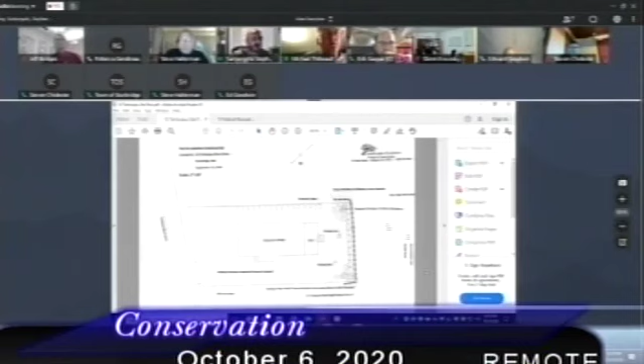Yeah, exactly. So what we were thinking was to just build the stairs in that section and then move those plantings in and along the hedgerow so that we could have a little bit of access down from the backyard to the beach. So that little bare spot there could get filled in with the plants, and then the steps would basically take up where the existing or the proposed plantings would be in that corner there.

Yeah, all right, that was the only change I needed to ask for. And that would be in the location, going through the committees.

Go ahead. No, I was going to say, and that's in the proposed location where the existing stairs, the wood stairs are? Okay, correct. Yeah, the only difference in the proposal is that instead of the stairs protruding into the water or shore area, they would be recessed into the land area.

Oh, okay. Yeah, that would be seen as a good improvement. I think the commission, if you feel that's minor, Steve, and you want to see that shown as a revision, I think you could still, if you wanted to, because it's a very minor thing, have him add that on there. After, if you wanted to approve it this evening, you could still have them add that, send it to me, if you felt that was small enough to be added without coming back to a meeting.

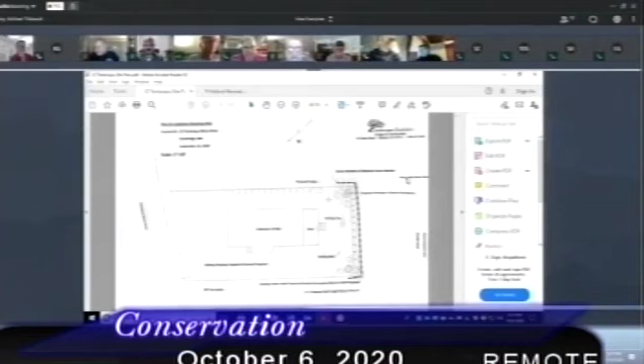I mean, I've seen it probably up on the wall, maybe by a foot, but more often I've seen it with the water not even on the wall. But I don't know what Steve's take on that is.

Yeah, I mean, over the years, I've only been at the property 3 years. And so it has touched the wall, it's come up on the wall, and it's as low as it's been this year.

I can't really speak historically to anything beyond that. Oh, the wall is going where the existing wall is, right, Stephen? Yes, sir. Yep. There's no change.

No change to the wall location or height. And as Becky mentioned in the beginning, I know a handful of you have been out to the property, but there's a really beautiful maple in the backyard, and they intended to preserve that and not change the location of the wall.

What about the foundation? Do you have to change the foundation at all? We had met maybe a month or so ago to talk about elevating the house and putting a foundation under it. That was a request for determination, which was approved. So there's no changes to the house or the footprint or those plans in consideration of these.

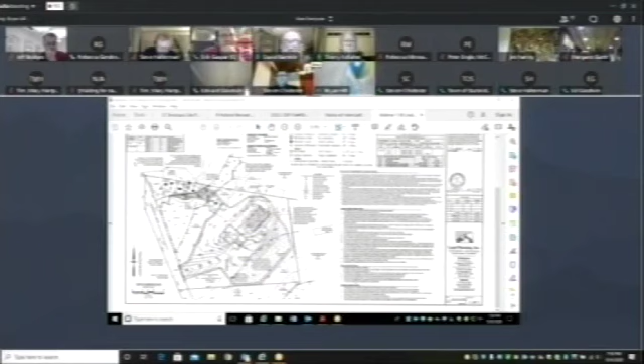All right, I'd like to share with you the stream stats report for that watershed. As you can see where we've clicked, let me get you in. But we can't see your screen. Yeah, you can see where we- Jeff, can you share this? Can he share his screen? No, I'm actually using my camera. I just flipped it to the other side. Where's your screen? Can you see my camera? Hold on one second, let me see. That's the best he can do.

I don't think that's giving adequate indication of where we're at. This report, I can send again if you don't have the link. But the important part is that the 99% duration is at 0.002, so it's about one fifth the cutoff. And the square mileage, I can tell you as well, is 0.25 square miles, so it's a quarter of a square mile watershed area.

Yeah, no, I understand. We always do this first before we flag a wetland. We always run the stream stats on any questionable stream, or really any intermittent stream. First thing we do. And then perennial streams, obviously- Yeah, they're- this one's shown as perennial though. So for perennial, in order to show it's not perennial, there is a process outlined, and that's documenting no flow conditions over a period of time, et cetera.

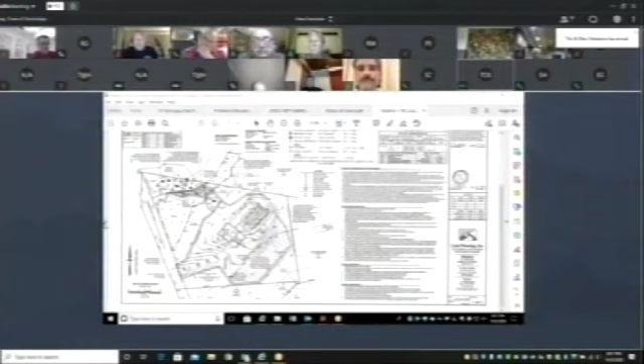That's up to the board. As far as the project as proposed, I'd like that we see, let me put the screen back on here, that the driveway has been relocated outside of the resource area, so there's no direct impact there.

Some things for consideration for the board for the driveway is thinking about runoff coming down there. There was some significant runoff concern coming down the road that does go further down and into the resource area, so it's something they should take into consideration.

And then also the area of the vista pruning is a pretty steep slope that does lead down to a resource area. So I just didn't know, and it's something maybe the commission can take into consideration, if there's an alternative to the vista clearing that would meet the needs of the applicant, that would give him the views of the lake that he's looking for, that might keep the forest floor and some of the vegetation there, so that way there's not runoff into the resource area from that.

And then also, just to remind the commission too, that when we got involved with this, there were some outstanding conditions related to the permit issued for the raze and rebuild on 118 Lead Mine that I know the applicant has indicated he's working on, but those things are still outstanding and haven't been addressed to date. And just so I don't forget, I do have public comment to provide afterwards that was received in writing for the board too. But that's all I have at this time.

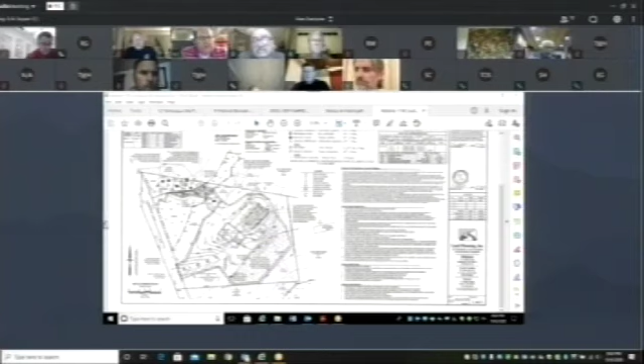Eric? Becky, I have a question for you. When we were out on site, the applicant had mentioned that when the perc test was done, there was another member of the town, I think it was somebody from the Board of Health, is that correct? Because it looked like there was additional disturbance up top.

Were you able to go back and talk to whoever that was and get their opinion on whether or not the footprint of where the house is going would additionally disturb more than what would be required to just do a regular perc test? I did. Actually, the Board of Health agent did accompany me on the site visit, so he did verify that the disturbance was from the perc test up top.

Okay, thank you. I just wanted verification of that.

Mr. Chair, hold on one second. Nothing else. Mr. Chair, where are you? Go ahead. Mr. Hill, we're getting feedback on your microphone somehow. Do you have your volume turned up too loud? Do you have a radio in the background? No, no radio, nothing. All right, maybe turn your volume down a little bit on your speaker. I did. All right, thank you.

All right. Thanks, Jeff. Steve, I see you leaning forward. I figured. I think I spoke. Okay, Stephen?

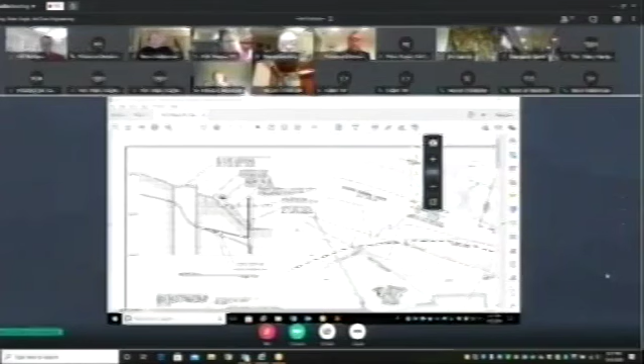As this bank is eroding, that water line is getting closer and closer to the surface. So in order to protect that water line, the applicant would like to armor the bank to stabilize it and prevent any additional erosion. For that stabilization, we are proposing some granite blocks laid on the existing slope with a coir log installed above that with some plantings.

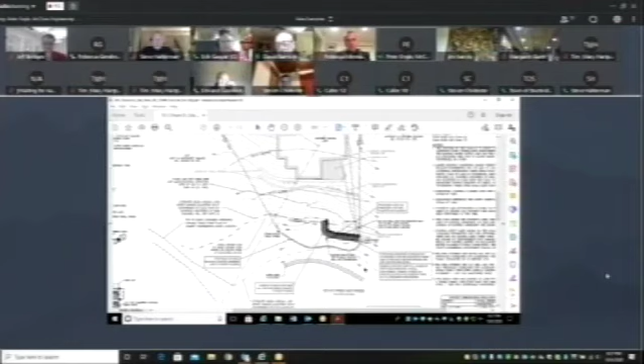This will help to protect that bank from wave action, rising water, ice, and erosion issues. We are proposing some minimal flood storage impacts from that stone, just laying them on the banking there.

This will go to the Army Corps as a self-notification. I believe it qualifies for the self-verification form, and it is within the mean annual high water of the pond. We do plan on filing an RDA with DEP for the Chapter 91 to see if that's applicable to this project.

Also part of this project, there are currently some stairs and an aluminum deck installed on the hill down to that well, which were not originally permitted. Those have been added to this plan to make them legal, if you will. Those would provide access to both the irrigation well and the drinking water well.

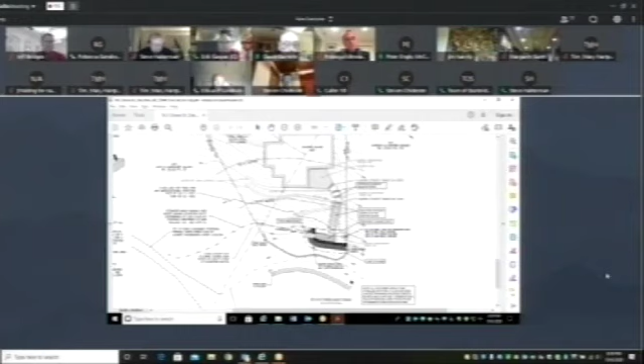Okay, Becky? Okay, so as Ed indicated before, we don't have a DEP file number at this time, so you're going to have to continue this. With that said, the site is mapped as priority habitat for a state-listed plant. Natural Heritage has commented with a no-take for this, so they have no concerns with this project as it relates to that rare species.

So with this for resource areas, or actually to go back, sorry, we did receive an alternative analysis today, which I will provide to the commission for your review. You can look at that before the next public hearing for it. Resource areas on site being impacted...

As Pete said, we do have bordering land subject to flooding. There is bank here and land underwater. The site also contains riverfront area, which is shown on the plan, but there's no work proposed within that resource area. It would appear to me, going back and looking at the wetland regs, that the bordering land subject to flooding would need to meet the performance standards.

So it would appear that you should be looking to make up the flood storage. I think it's 65 cubic feet, I think I wrote down that you had on there. So I would recommend that the commission ask them to see if there's somewhere on the property that you can make up that area, so that way you're not having that impact to bordering land subject to flooding.

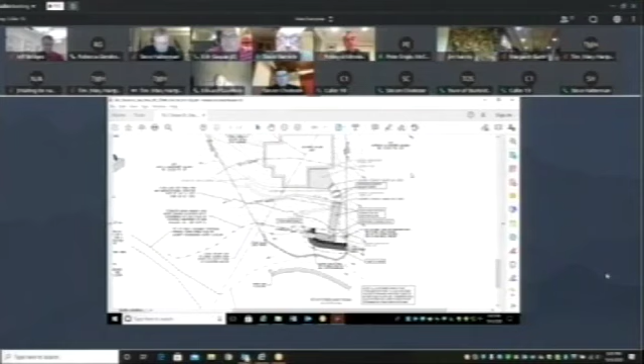All right, so Mr. Nemo, you all right with a continuation? Peter? Yes, I am. Okay. Any further discussion? Mr. Barnacle, public comments. In favor? Yeah, oh yes, that's good. Thanks, we need public comments.

Jeff? Thanks, Eric. Yep, we're on it. Just going to add, I do have a written comment to share, but I'm going to go on the line first. Is there anyone on the line for the Notice of Intent, DEP file number 300-TBA, 76 South Shore Drive? Okay, there's nobody on the line.

Yep, I do have written comment, which I will share. So I did receive an email from Mr. Gary Allard in regards to the notice of intent application for this property.

It says, we are requesting that the commission and DEP not accept or approve the new NOI application requested by the owners of 76 South Shore Drive as written. The owners failed to install the check dams and water control measures on their property that was required as part of their previous orders of conditions. This was for work in a riverfront riparian area for the construction of their new garage.

The Conservation Commission and DEP mistakenly closed their previous orders of conditions without the owners completing the necessary work in the riverfront area that was required. This oversight by the Conservation Commission and DEP allows uncontrolled water flow from their personal property in the riverfront riparian zone to cause damage to the properties below. This has allowed uncontrolled stormwater to bypass the drainage system at 31 South Shore Drive and during heavy rain events causing damage to the roadway, abutters' properties, wetlands, and the lake.

Becky: Yep, so I'll just start on this one. This was a continuation from our last meeting where we did discuss this lot. I did go out and do a site visit, as the board did, then I went back out to review the delineation a little bit more. So what you see in front of you here is a revised plan. I'm just going to kind of zoom in here.

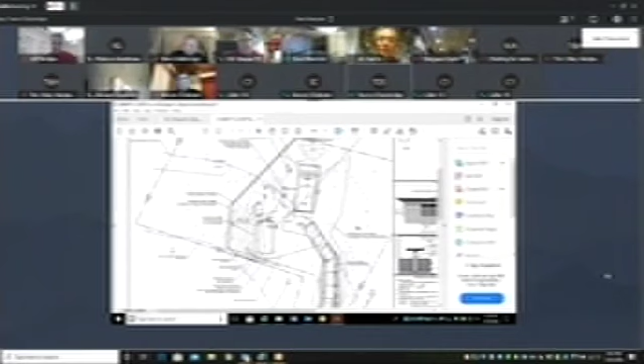So upon review of the delineation out here, I did have some concerns with that delineation and was able to rule out the back portion of the lot being a resource area. So I did speak to the engineer and the property owner about this. I asked that they revise this plan to show the jurisdictional area, I'm trying to zoom in enough so you can see it, but I'm losing part of it.

So I asked that they revise the plan to reflect my review of the site and just show, on this lot, this wetland over here as what we have for resource area. The area back here, I think part of it, as you can see where my mouse is, there is a road drainage swale that comes down, which I had some question in. I think that has brought, for quite some time, a lot of water down here, and maybe when they did the delineation, some saturation may have influenced that being called a resource area.

So I did a thorough review back there, walked back pretty far. It does drop off pretty steeply. Down below that's an intermittent stream. So I was able to use the 200-foot tape and rule out that we're pretty far from that. So I feel confident that that's not a resource area back there. I asked for this revision. There is still work within jurisdiction.

So my recommendation at this time, as we are limiting our review to this being our resource area here, my recommendation would be to move forward with approval of the plan, with the conditions being our typical conditions that we include in any of our orders. I think it's important, with the steepness of the driveway, especially where it comes in, to make sure that they have extra erosion controls there. I would ask that we condition that to have extra erosion controls in that area.

Otherwise, I don't have any concerns. The driveway isn't pointing towards the resource area, so I don't see the need for any additional BMPs for stormwater at this time.

All right, great. Starting with Mr. Haldeman, any comments? Mark: Yeah, I was out there and saw how amazingly steep that slope is, but I agree with Becky that if they do some appropriate erosion control, then I think we'd be in good shape. Eric: Yeah, I'd agree. I still don't know how that driveway gets in there, but that's not my problem. It's a good project, and I'd be in favor of it. David: No comment.

246, please. Is there anyone on the line that would like to speak in regards to 246 Holland Road, Notice of Intent, DEP file number 300-1072? No public comment.

Hearing none, I have a motion to close the public hearing. Steve Haldeman. Second, Eric Gaspar. Discussion? Hearing none, all in favor? Stephen?

In favor, Stephen Chittister. Eric Gaspar in favor. Steve Haldeman in favor. David Barnacle in favor. And Ed Goodwin in favor.

All right, now do I have a motion to approve 246 Holland Road? Make a motion that we approve Notice of Intent, DEP file number 300-1072, as indicated with Becky's notes. And I concur with Eric, man, that is some slope.

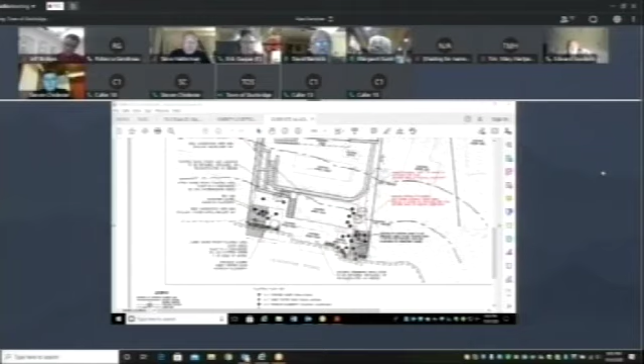Yeah, so I just wanted to add, since the permit has been issued, I've been working with the Gunns on this. They have been keeping me updated on their progress. I have been out there multiple times. Just to reiterate, that shoreline wall was something that wasn't anticipated, as it wasn't clear what was underneath the overhanging decks there. So they had discussed with me adding some stone on top of it to stabilize that, which I didn't think was a big deal in its current condition. As far as the planting goes, the plan varies a little bit. I did ask them to complete that sketch to show what was put in down there. There are trees and shrubs and some herbaceous planting. They did indicate that they're going to do a little more of what's supposed to be a wildlife conservation seed mix on the hillside. I think we started calling it wildflower, and maybe that's where some confusion came in. But they are committed to do some additional seeding on that hillside, so that's not lawn. I do think that the removal of all the structures, especially the ones overhanging the water, is a significant improvement. And they do have some lawn area for sitting out there.

One of the other things noted on the site visit, which I did ask them about afterwards, there was a section where straw wattles were holding up the embankment. They do plan to add some stone or blocks there. That was more of a temporary measure for the time being. They will put something more permanent there, as noted on the site visit.

In addition, the swale on the side of the property, noted to be on the adjacent property owner's land, I will follow up with them regarding that drainage swale. So overall I do think there has been a significant improvement to the site, and with that, an improvement to the resource area.

It's up to the commission how they want to move forward, but my recommendation, my feeling, is that they've complied with the intent of it. It did vary slightly, but I think getting the as-built that reflects the on-site conditions is needed and will be useful moving forward for this. That's all.

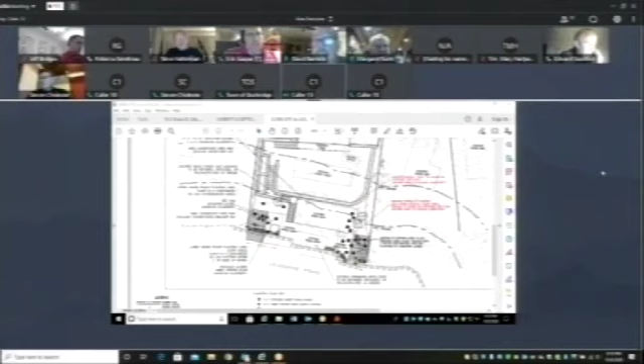Mike? Yeah, Mark, are you still on? Mark Farrell, can you hear me? Yes, go ahead. Okay, Mark Farrell here. I can have a plan. I'm sorry, I didn't get a chance, I didn't have time to get it done for this meeting. My intention was, but I can certainly get it done prior to the next meeting.

I assume you're going to be meeting in a couple of weeks. So in about a week or so, yeah, the next meeting is October 20th. All right, great. If you could have it for the commission to review by the 15th, that would be useful so they can have it in advance.

And then also, one of the other questions that's been asked, the Gunns have asked for the fines to be rescinded. That's something, if you want to discuss that this evening, or you want to wait till you get the as-built plan, that's up to you. I'd like to wait till we get the as-built.

Any other input? I have input. It's me, Mr. Gunn here. You put these fines on as an incentive so I would do the work, not to stay on till the very end. And if they do, that's fine with me. I'd like to know who's going to go up with me to court. Which one of you fellows want to join me?